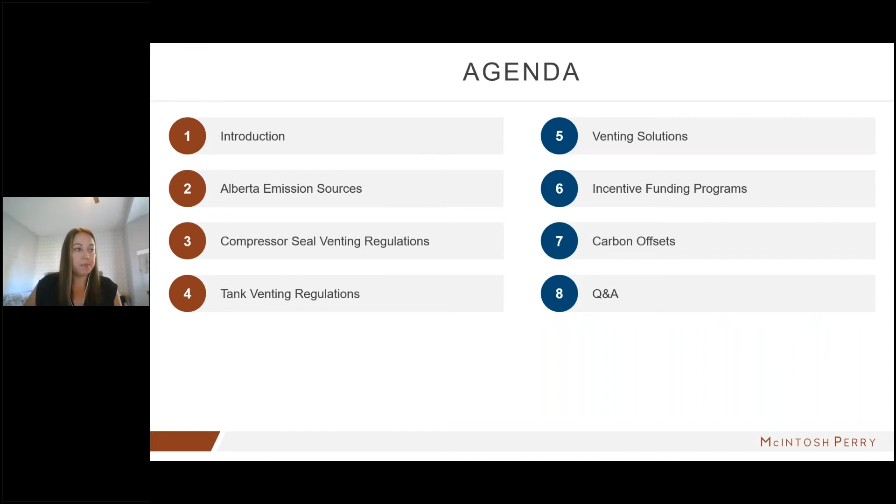So we're continuing to receive a lot of comments from our clients on greenhouse gas emissions. A lot of the questions that we're getting are with regards to the actual regulations, timelines, and reporting requirements, how they specifically apply to some of their facilities or their whole fleet of assets. People are coming to us with: what are the options for methane emission reduction? What does that look like in terms of cost? And is there any financial support to help us push these projects along? Not all of them are cheap solutions, although some aren't too expensive. And so it's great that we do have some funding options still open, incentive programs, and also carbon offsets to help support these projects.

So looking at Alberta's upstream oil and gas emission breakdown by sources. As I mentioned, we're going to be talking about tanks, which make up about 19% of Alberta's upstream oil and gas emissions, and compressor seals, which make up 6%. So 25% of Alberta's upstream oil and gas emissions will be the topics for today.

If you happen to miss my last presentation, it was on pneumatics and some of the solutions around pneumatics. We did that one a couple of months ago, and it is available on our website. Pneumatics make up 22% of upstream oil and gas methane emission sources. And just to note, this figure is taken from PTAC, and I think it's about a year old. So potentially the numbers have shifted a little bit, as in the last year a lot of people have been undertaking projects at their facilities to reduce their emissions.

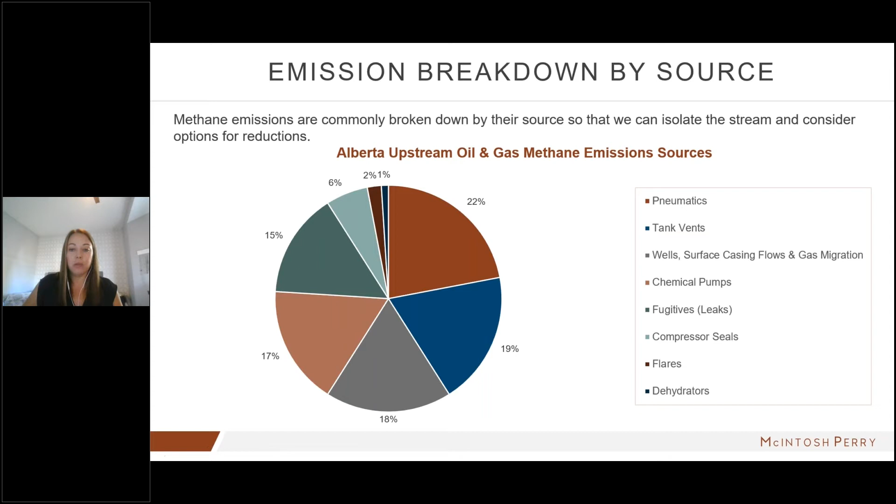So getting right into compressor seal venting. Both reciprocating and centrifugal compressors drive natural gas containing methane. These compressors have dynamic seals that wear and start to vent natural gas as a part of their normal operations. For our reciprocating compressors, this includes the piston rod packing vents, drains, and the distance piece vents and drains, including the purge system vents.

And compressors with wet seals, so those that use lubrication oil to run, are especially prone to venting higher amounts of methane, just as a part of their regular operations. Then in order to avoid equipment damage in sour service, pressurized purge gas is used to force directional leakage where gas can be captured. As I mentioned, these aren't huge emission sources at your facility. They're about 6% of overall emission sources.

And I will note that this doesn't include any emissions caused from the compressor engine, so the combustion itself that's taking place. Also, the gas emitted from the crankcase of a controlled reciprocating compressor is considered a fugitive emission and also not included within the limits that I'm about to go over on the next few slides, as well as the vent gas from engine and turbine starts. Blowdowns, that's all managed under the overall facility venting gas limit. So again, that's not included with the compressor seal venting regulation limits.

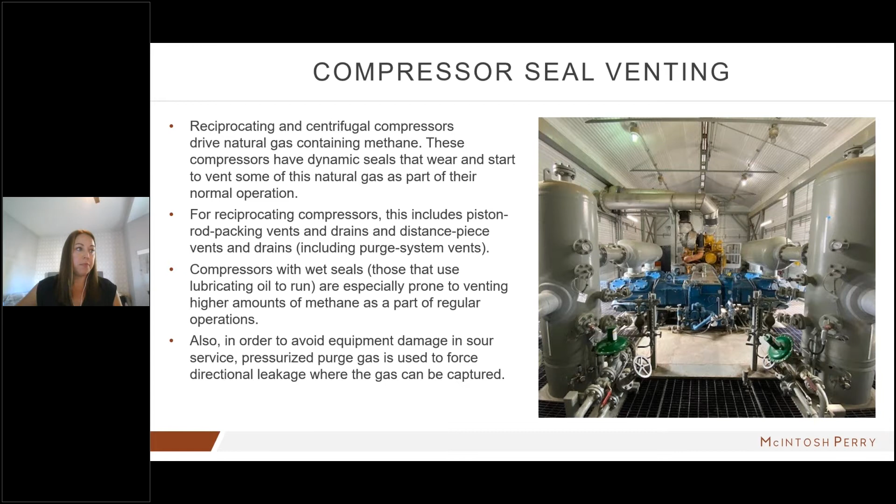So now, as we look at these limits, I'm not going to necessarily run through each of these numbers per type of compressor and per date, but what's important to note is that all of the compressor limits within Alberta come into effect January 1st, 2022. These emission limits apply to compressors that are rated for at least 75 kilowatts and are running at least 450 hours per year. That's not a lot of time. That's only about 18 to 19 days of running time.

And in addition to these limits, the way you're confirming whether you're hitting these targets is within Alberta, you have to test your compressor seals for their emissions every 9,000 hours that those compressors are pressurized. That works out to approximately once a year. And if you find that you're exceeding the emissions for that compressor, the operator has 30 days to bring that compressor within compliance.

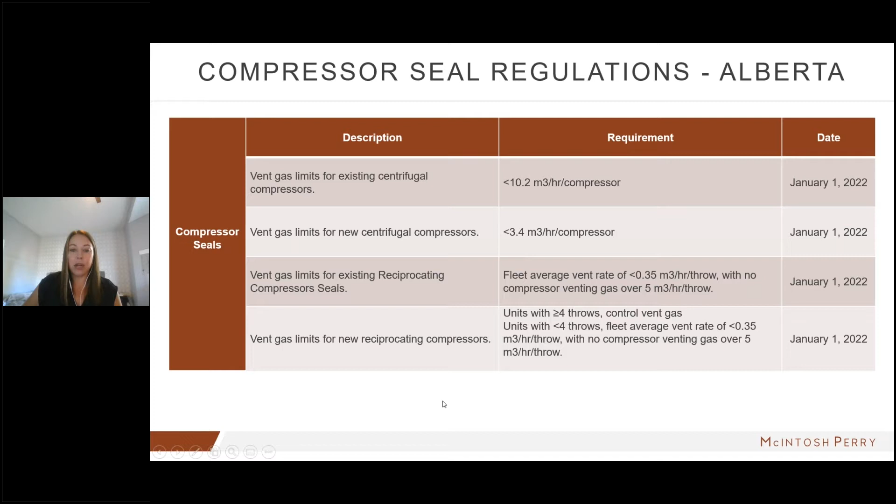Within British Columbia, fairly similar. They break down the difference between reciprocating and centrifugal compressors as far as what the limits look like. One of the major differences in BC is that some of these regulations are already in effect as of January 1st, 2021. And for some of the existing compressors, so anything installed prior to January 1st, 2021, their limits come into effect as of January 1st, 2022.

One thing that's really interesting to note with BC's as well is that they're basically saying all new reciprocating compressors that have 4 or more throws must route all emissions to gas conservation equipment or flare. So they don't really give you an emission limit there. They just don't want venting to occur out of those compressors at all.

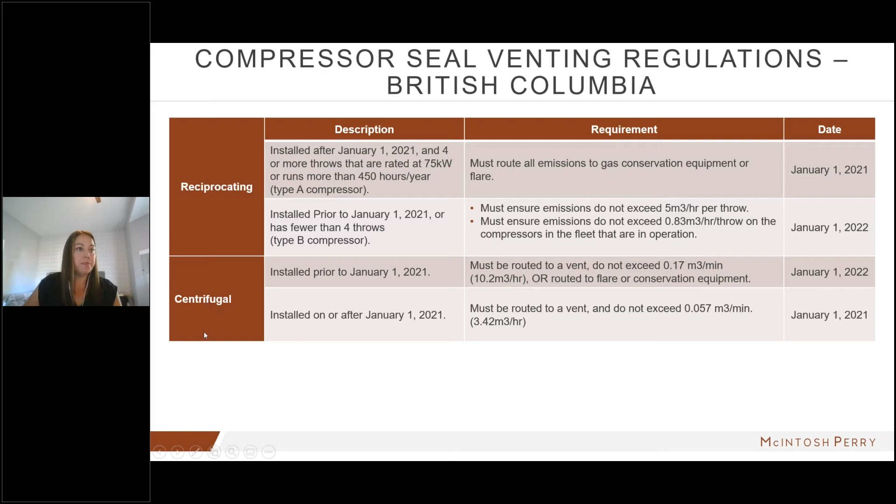Now, looking at this from a federal standpoint, they have their various limits listed depending on whether it's existing or new compressors, as well as whether they're centrifugal or reciprocating. So similar to the provincial requirements. One of the biggest differences at the federal level is that these all come into effect January 1st, 2023. So they give an extra year there to come into compliance.

I think that's mainly because the federal emission regulations apply to facilities that are federally regulated, those regulated by the Canadian Energy Regulator, formerly NEB. In a lot of cases, these are large compression sites on major transmission pipelines. So the compressors are quite a bit larger, and they are more likely to be venting at higher rates than typical upstream oil and gas facilities. And just like within the provincial regulations, the compressor seals need to be checked once a year to determine compliance with your emission rates.

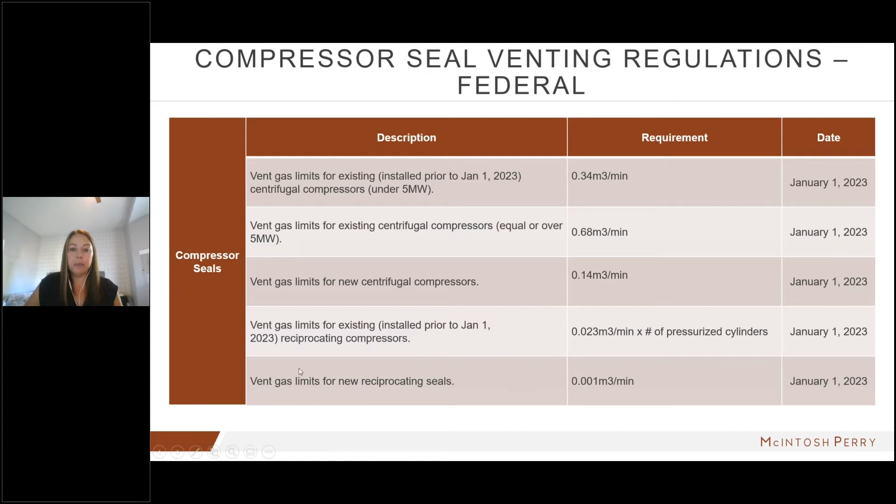So I'll chat a little bit about the tank venting now, and then after I finish that up, I'll go into the solutions for both, because in a lot of cases, the solutions are quite similar for tank venting and also compressor seal venting. So your typical oil and gas facilities are going to contain a number of storage tanks that typically do vent or leak emissions.

So you're looking at oil storage tanks, condensate storage, raw produced water, waste product storage, and the volume is really quite variable depending on the flow rates and the type of operations that are going on at that facility. And where you're actually getting the venting occurring from these tanks is due to displacement of production fluids through loading and filling, the flashing of the stored fluid, and breathing of your tanks.

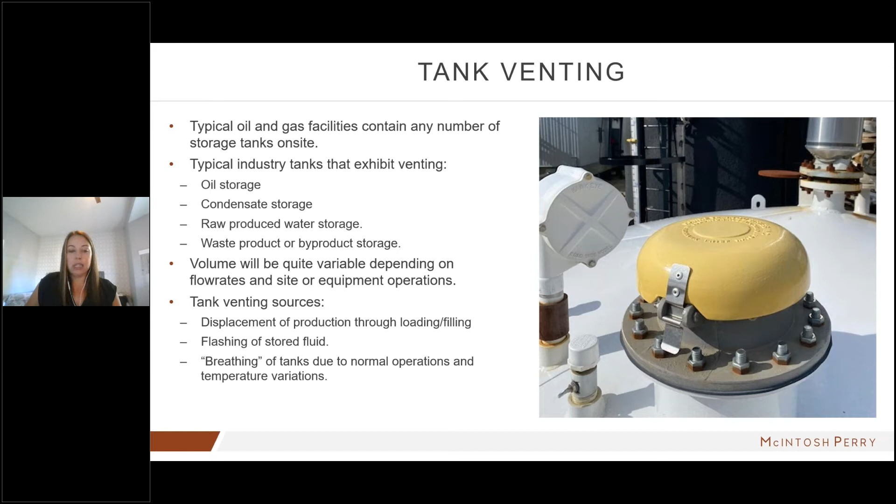Really, it's just a part of the natural operations at most facilities that these tanks are going to be venting some emissions. And we're finding, based on a lot of the data that's coming back from a lot of the fugitive emission studies and other emission studies and measurements that are going on in the field, that the tanks are definitely the highest emitters out there, and therefore one of the areas that's being targeted for emission reduction.

So when you're looking specifically at tank regulations, although tank venting is one of the major sources of emissions that is counted for under the overall vent gas limit and the defined vent gas limit within Alberta, the tanks themselves don't have a specific limit in Alberta.

And just to define the two, your overall vent gas limit is all of your venting at a facility, both your routine and your non-routine venting, whereas your defined vent gas limit is from your routine venting. So that's kind of the major difference there as we're looking through these numbers.

Your overall vent gas limit is restricted to 15,000 meters cubed per month, or 9,000 kilograms of methane per month, and that just really depends how you're estimating and measuring those emissions, and that's already in effect. So that was in effect as of January 1st, 2020.

There were some exceptions to that number over the last couple of years, but now all of the venting falls under the 15,000 meters cubed per month, minus most of the exceptions that were there initially for the first year or two. Then you're looking at your defined vent gas limit for existing sites. So this you just have to follow the above rate, unless there's these exceptions. So I'm going to go over these ones next.

So the defined vent gas limit for new sites is actually 3,000 meters cubed per month. So again, your defined vent gas is your routine flaring or your routine venting, and you can see that that's substantially lower than your overall vent gas limit. Now you have to hit those targets as of January 1st, 2022.

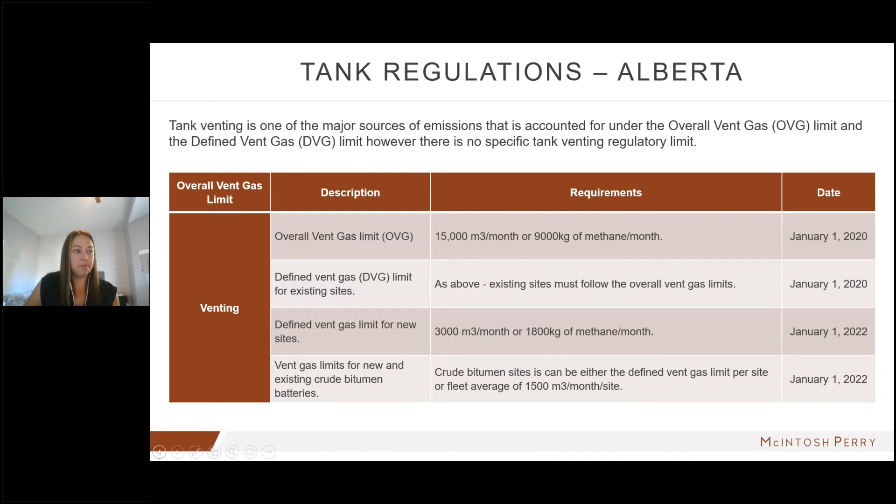When it comes to tank and compressor regulations within Saskatchewan, there's not specific numbers like there is within Alberta, BC, or at the federal level. In Saskatchewan, only oil facilities are regulated under the oil and gas emission management regulations, and tank venting is still, as it is most places, a really substantial source of emissions at facilities within Saskatchewan, and reducing your tank venting is one of the highest impact ways to reduce your compliance costs under the output-based system that they have within Saskatchewan.

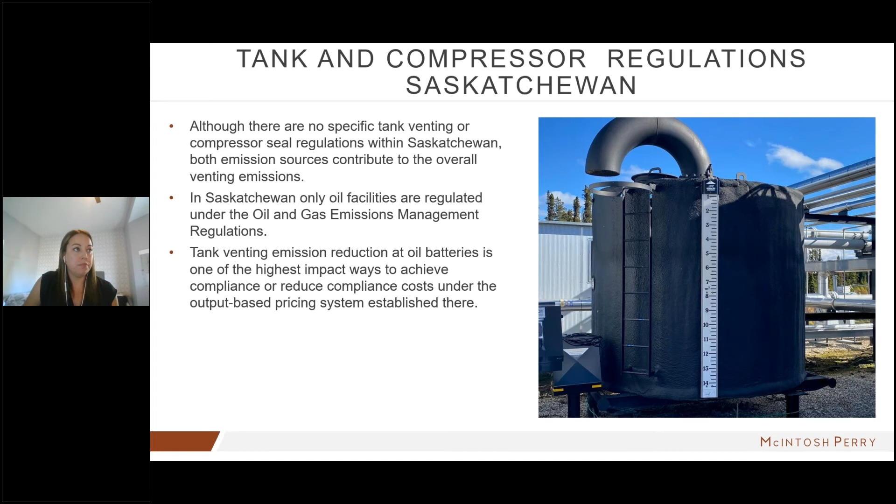Now, at a federal level, again, this is very similar to Alberta, where there's not specific venting limits for each individual tank or for a group of tanks, but where the tank venting is basically the biggest source of contribution to the overall venting at a facility. So for federally regulated facilities, they can't exceed 15,000 meters cubed per year from all of their sources. And just to highlight that, within Alberta, just to remind you, it's 15,000 meters cubed per month. So federally regulated facilities have a much lower emission threshold than provincially regulated ones do.

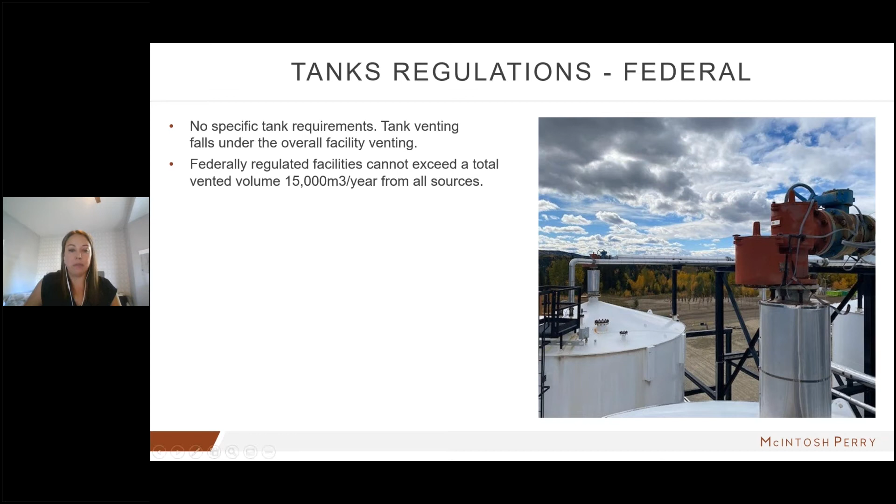Now let's talk about some of the tank venting solutions. So when it comes to tank venting, really the biggest factor is that it has to be a site-specific solution. There's so many variables at a facility that really play into what the best solution for reducing the venting at that facility is going to look like. So you have to consider your geographical location, your access to utilities, what other existing equipment and instrumentation you have at the site and what it's run off of, and also just the overall volumes, like how much are you venting at that facility and how much can you potentially capture or burn or conserve. So consideration to all of these factors will really help you match what the appropriate solution will be for that site.

So what I have here is in the darker orange, some of the site factors or considerations that you have to make when you're looking at tank venting. And then on the right, I have some of the proposed solutions. And note that some of these might happen in parallel or with each other. And there's some unique situations where you can either combine these or maybe we have to come up with something a little bit more unique or different altogether.

But one of the main things to consider when you're looking at what your solution will be is what is your proximity to a natural gas pipeline or a gathering system. Conserving that gas is always one of the preferred ways to deal with vented natural gas. So are you close enough that you can tie into another system? And if you are, let's get a vapor recovery unit going for you there. What is your existing facility energy usage? So there's also the potential to use that wasted gas at the site for repurposing to run on-site instrumentation or fuel gas supplementation.

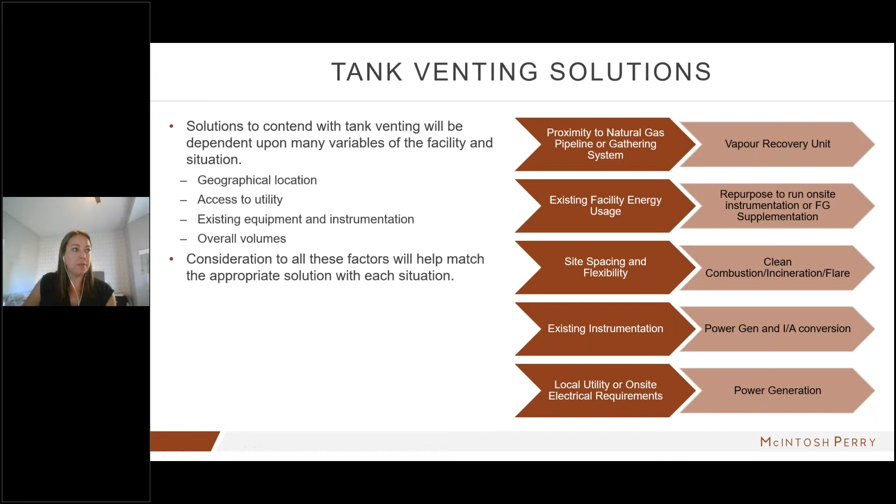Now, when we're talking about compressor seal solutions, a lot of the solutions are similar to tank venting, but one of the major differences is that with compressor seals, the maintenance regime is also really important. So just making sure that you're replacing those seals more frequently can be the way to get your emissions within the limits that we've stated.

I actually did participate in a study just prior to coming on to McIntosh Perry, where we analyzed the leakage rates from compressor seals from thousands of compressors across Canada. And what it showed was that although the manufacturers might state that you only need to replace the seal every 5 or 10 years or whatever's in their warranty, we're finding that for the first couple of years, the seals weren't leaking beyond the emission rates that we have listed within the regulations. However, after about 4 to 5 years, they usually were.

So in some cases, you may not have to replace the seal for 10 years, but replacing it more frequently may bring you down to venting a low enough amount of methane that you can at least keep it within the limits. New seals also do have a bit of a break-in period, so they require due care and attention from operators and mechanics to confirm how much they are venting during that period, and then they do require continued monitoring.

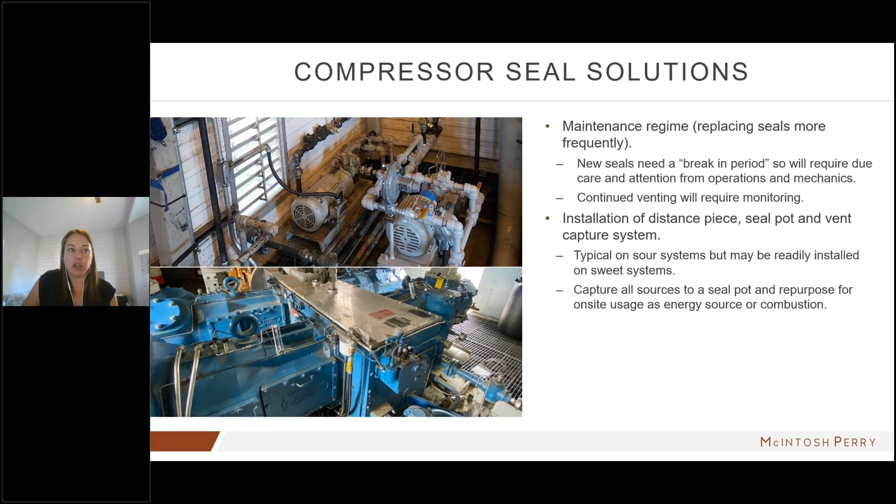I should note that we're also seeing that the manufacturers of a lot of these compression units are coming up with a secondary seal system where they're containing the gas, and these can be added to existing compressors, or purchased with new compressors, and they're in the works of getting them more readily available. But again, that's mainly going to help you capture the gas, and once it's captured, there's lots of different ways to utilize that.

So now that we've talked about the regulations and some of the ways to reduce your emissions at these facilities, I'll talk a little bit about some of the incentive funding programs that are still available that can help you fund these types of projects. The first one is the Methane Technology and Implementation Program. This program just celebrated its, I think, 1-year anniversary this last month. And the funding is still allocated on a first come, first served basis.

The way it works is they'll fund up to 50% of your project costs, but there is a maximum of $1 million per owner, and a minimum project payout of $10,000. So they do want your project cost to be at least $20,000. This program is stackable with other funding options such as ERF, which I'll talk about in a couple of slides.

And one thing to note about this one is you do have to follow an eligible protocol. So I will show you the eligible protocols or project types on the next slide. And although I do mention that this program is stackable with ERF, I will very specifically note that if you are accepting MTIP funding, you cannot also generate carbon offsets.

Now that's for the specific project, not for that company as a whole or even for the facility as a whole. But if you are doing a pneumatic replacement on one type of device, that same device cannot be double counted for a carbon offset as well. It is one or the other.

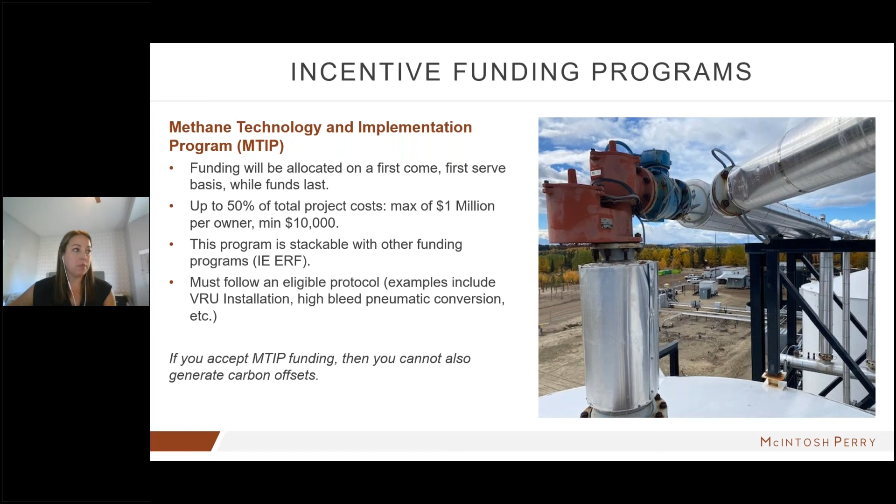of the application process. But the approved project types are: under pneumatic devices, electrifying your pneumatic devices, converting from high bleed to low bleed, from instrument gas to instrument air, and then also capturing that gas for repurposing or for combustion. For hydrocarbon storage tanks, you can destruct the venting from a hydrocarbon storage tank in a clean combustor. You can add a VRU, so any conservation of that gas can fall under that category.

And then they call it hydrocarbon tank destruction elimination, which basically is, if you're already flaring at your site but you'd rather conserve by adding a VRU, you can do that as well and get some funding through this program. As far as compressors go, compressor vent gas capture and repurposing or utilization, compressor vent gas conservation, so tying that into an existing VRU system at the facility, and then compressor destruction emission elimination, so basically that clean combustion of your compressor emissions.

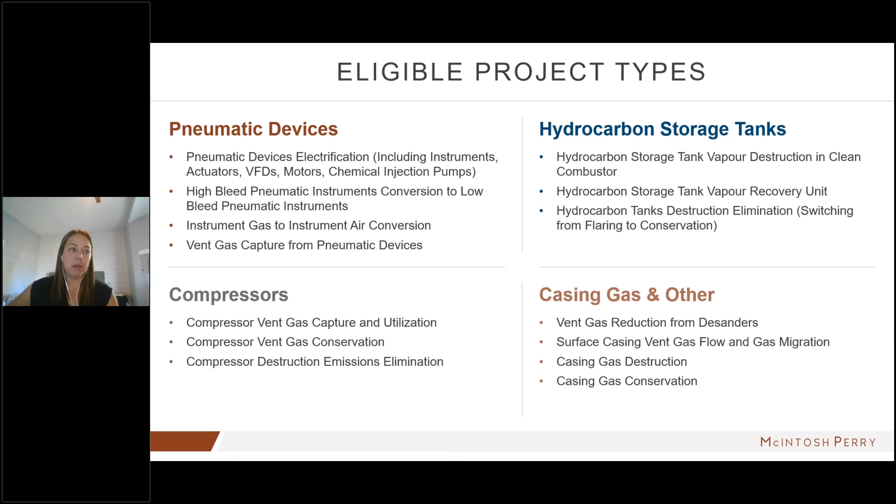So talking about the Emission Reduction Fund. This fund has also been out for right around a year, I believe. This one's delivered through Natural Resources Canada, and it was a $675 million fund when it first came out. They haven't specifically noted how much of that is left, but they have had 2 previous intakes for this program. They recently opened their 3rd intake.

The way this program works is they will fund up to 75% of your project costs, but the funding comes in the form of an interest-free loan. Now, the key with this is if you just choose to accept an interest-free loan from ERF, then you can actually pair that with carbon offsets. However, if you choose to have any portion of your loan forgiven, so basically a portion of your loan becomes a grant, then you can't claim any carbon offsets.

So I do want to note that right there. But when talking about a portion of your loan getting forgiven, this is one of the biggest changes that they made in this 3rd intake. They really increased the amount of the loan that could be forgiven. So it started off as about 10 to 50% of your project could potentially be forgiven. And that's for when you do eliminate emissions, I should say.

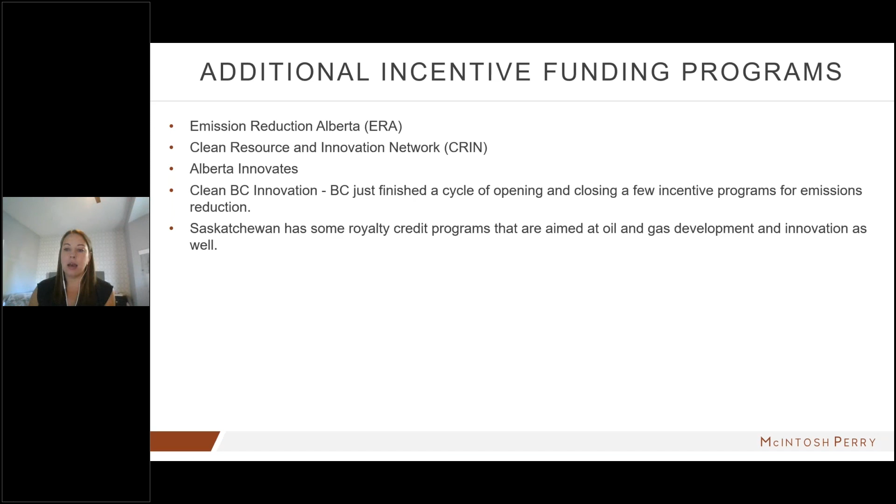And then Saskatchewan also does have some royalty credit programs that are aimed both at just oil and gas development in general, and then also innovation. And I think that most people that are working within Saskatchewan are utilizing these to some extent, but if not, that's definitely something I can provide more information on as well.

So, we were talking about a bunch of the different incentive funding, and one thing that we can't miss when we're talking about financial support for our projects is to look a little bit at carbon offsets. One of the major things with carbon offsets is that within the Alberta carbon offset market, you can only generate an offset for 1 ton of CO2 equivalent if it's going above and beyond what the regulations are requiring you to do. So currently, with new regulations coming into effect, there's often timelines involved. Acting sooner rather than later will get you more carbon credits than waiting.

But one of the new draft protocols that has come out that's really related specifically to the topics that we've been talking about today is, I think they actually just renamed it. So it was solution gas conservation. That's what everyone's been referring to it as for the last year or two, but I think it's actually now called vent gas reduction. A draft of that was released in June for comments. Comments were expected to be finalized in August 2021, and that final protocol is expected in this fourth quarter.

So anytime we could see a final protocol of that vent gas reduction protocol come out, and that protocol allows you to do the quantification listed within it in order to generate offsets to be sold on the Alberta carbon market. When it comes to venting, it's going to apply to emissions that are under 500 meters cubed per day at your facility, because anything over that, the regulations require you to do something with anyways. So from 500 meters cubed to 0 is basically that space where you can potentially generate carbon offsets for conserving vented gas at facilities.